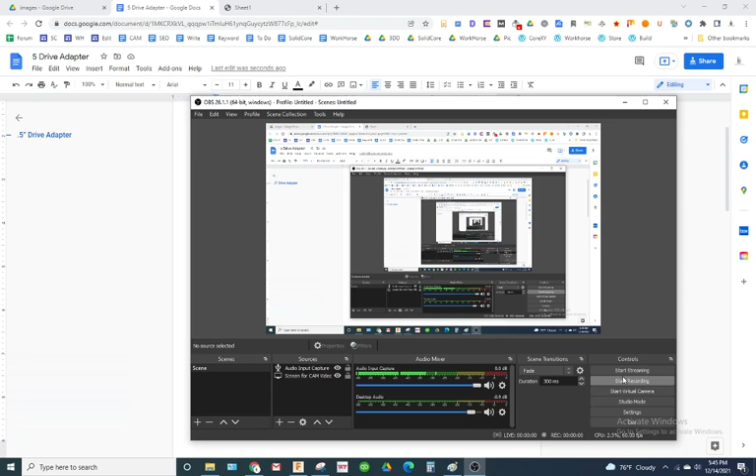Okay guys, so we're going to draw up this half-inch drive adapter.

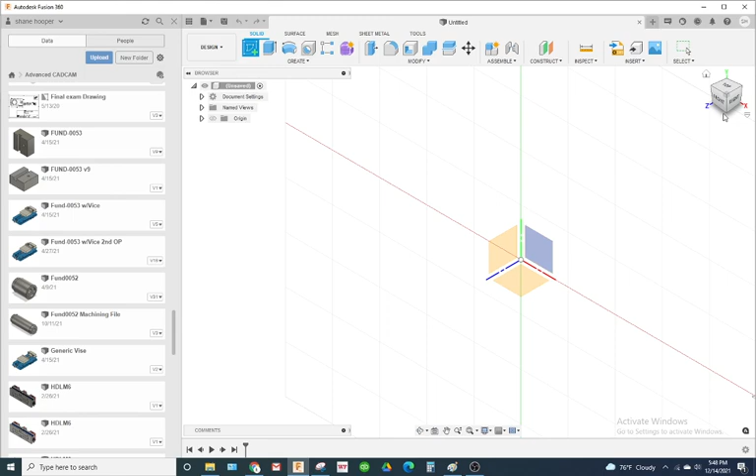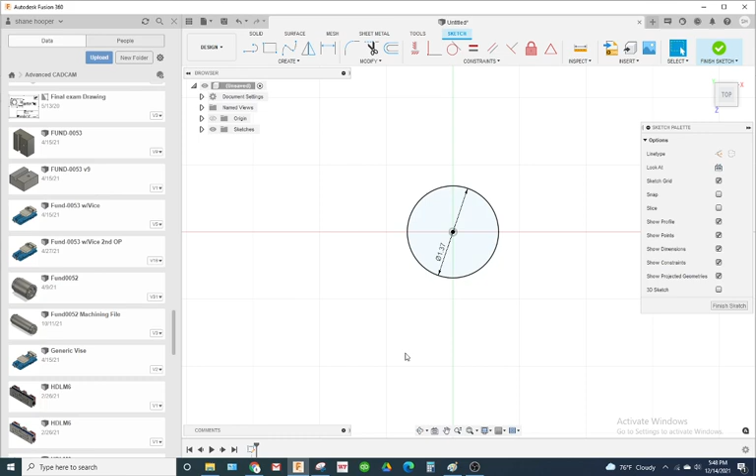So what I'm going to do here is I'm going to draw up a part, and there's a couple ways to do this. Go ahead and create a new sketch. I'll go ahead and select the top view, and we'll draw a circle. And remember, use the keyboard shortcut C for circle. Okay, so this was a 1.37 inch circle. We'll go ahead and put it at 512 thousandths long. It's not really 512, but we're gonna add the chamfer.

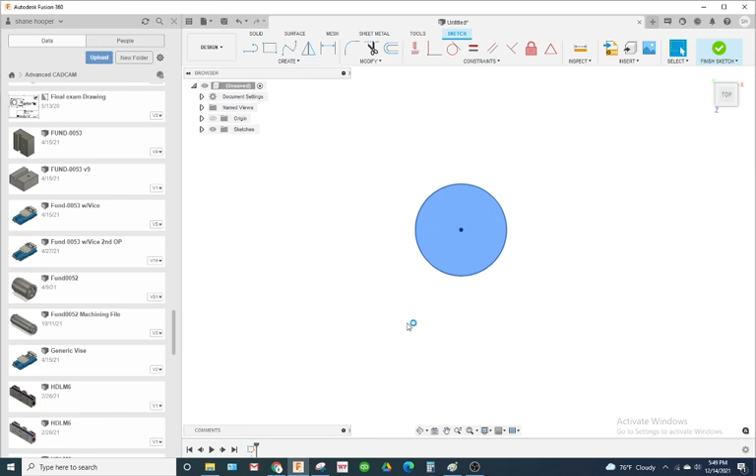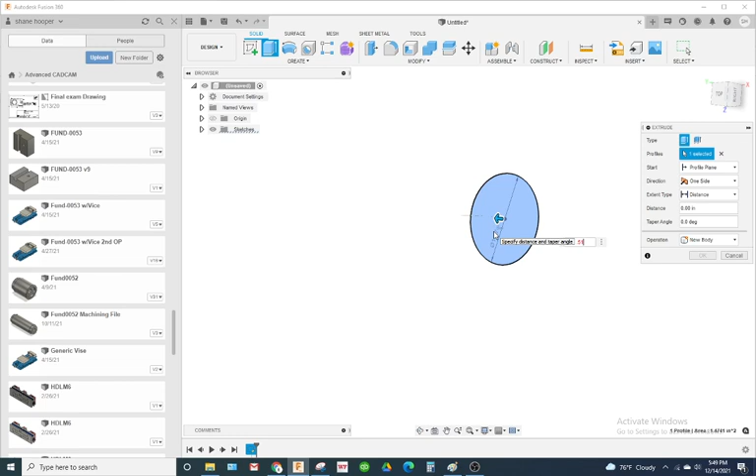So I'm gonna extrude this up, and you can draw the cross section too. That's a more formal way of handling cylindrical parts. So 512 thousandths. And this is in inches, by the way. Alright, so I'm going to go ahead and add onto that circle. So I selected a sketch plane on the face of that. So that's going to be the shoulder. The shoulder is 512. And basically we're going to draw...

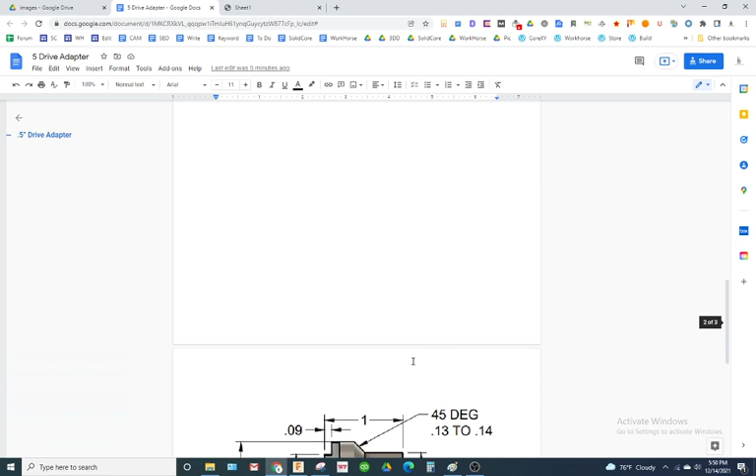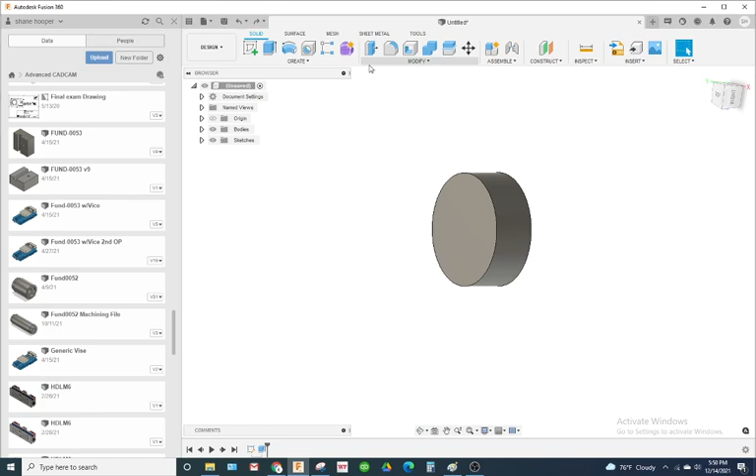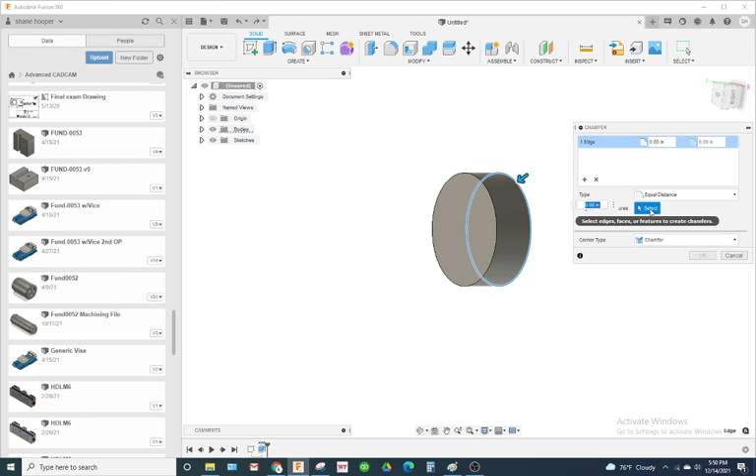Well, what we could do, we could go ahead and draw the hex. You know, I'm gonna hit back. I think I'm gonna do this a little bit different. This part's a little tricky. It doesn't look tricky, but it is. So I'm gonna go ahead and add that chamfer. Now the chamfer is 0.13 to 0.14. So we'll say 0.13. So I'm going to select this right here and make it 130 thousandths chamfer. So it looks like that.

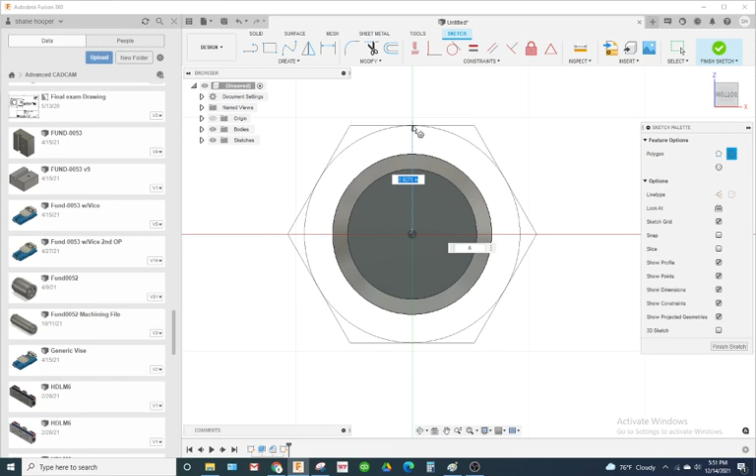And I'm gonna go ahead and create a sketch plane right here. And we're gonna draw a polygon. So it's gonna be a circumscribed polygon. So the math is gonna be based off the flat. Okay, so from flat to flat it's supposed to be 0.99. Now notice Fusion's going to give me the distance from flat to the center of the polygon. Alright, so what I'm going to do is I'm going to type in 0.99 divided by 2. And it looks like that.

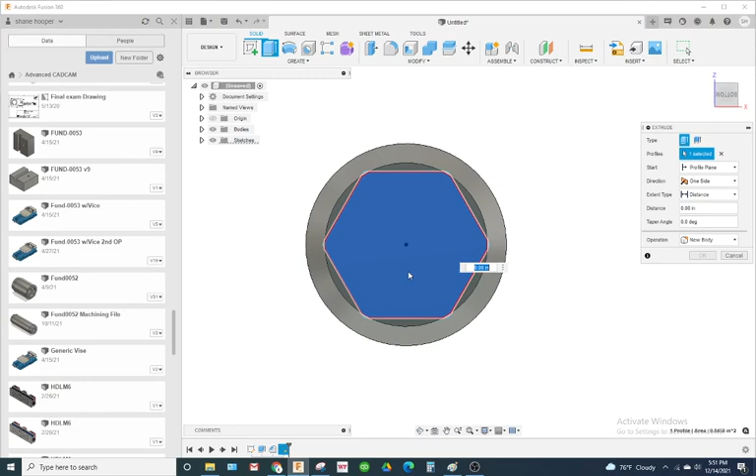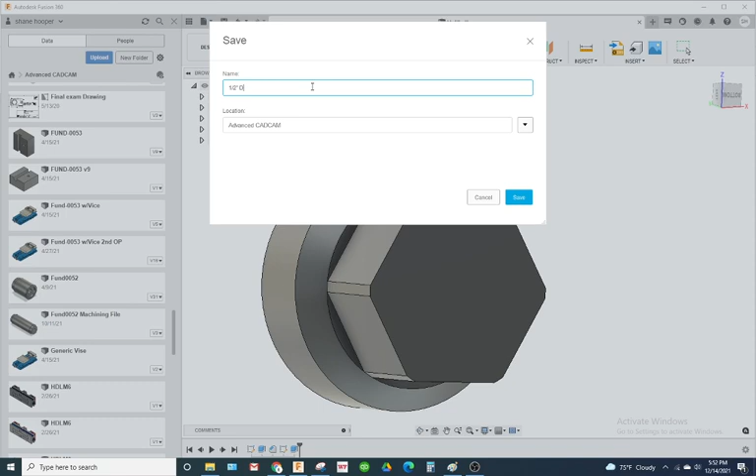Okay, so the hex is 488 thousandths wide. So I'm going to extrude this up 0.488. So I have something that looks like this. Go ahead and save that.

Okay, so we have a 3/8 drive. Basically, this is made for a drive socket wrench to fit in here, with a 3/8 drive, right? So, well, it says 0.37. That's because of the drives. This is a considerable amount of weight when it's made out of metal, and you don't want it to fall off the drive.

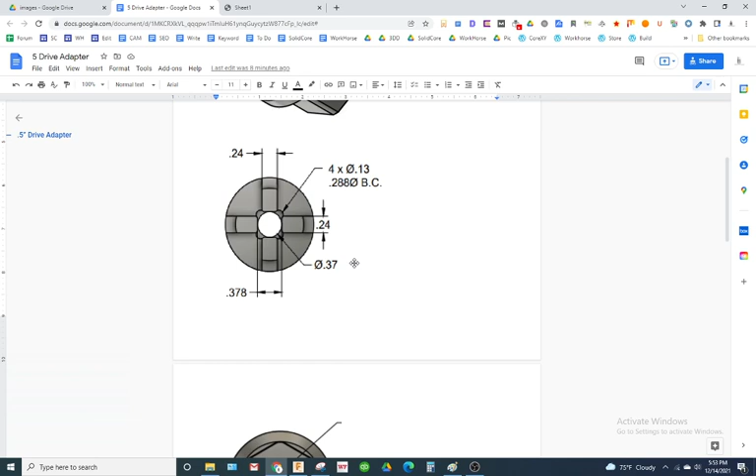So the drives aren't really 0.375, they're the other size, so this is gonna be 0.37, and it's gonna be on both sides. Now, because it's on both sides, what I'm gonna do is I'm gonna draw it up one time on one side and cut it all the way through, and draw out the rest afterwards.

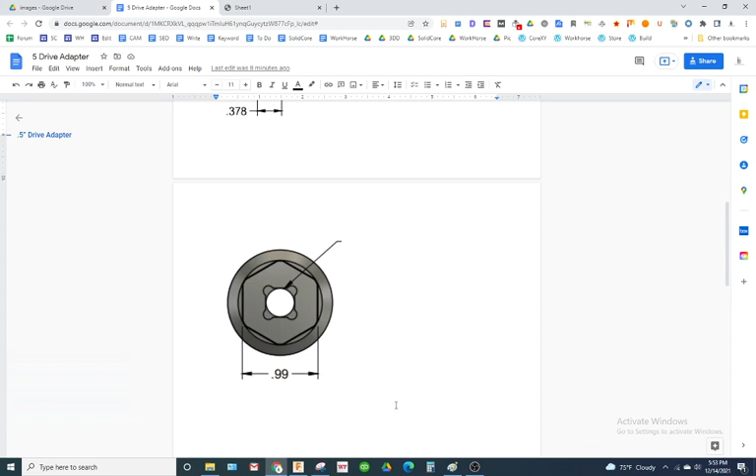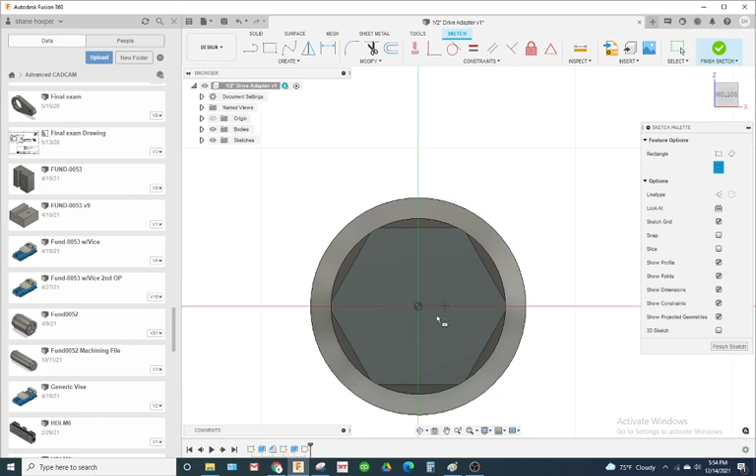Okay, so we'll go ahead and draw up a 0.37 square. I'm gonna create a sketch, select this plane, and I'm gonna go to rectangle, except I'm gonna use my center rectangle. I'm going to select my origin right here, 0.37, hit tab, 0.37 on both sides, and hit enter to place it.

We have 4 holes that are 0.13 diameter on a 288 thousandths bolt circle. So what I'm going to do is draw up one hole, position it and dimension it, then use my circular rotation tool and do a circular pattern to create the other 3 based off the first one. So 130 thousandths diameter, 288 bolt circle.

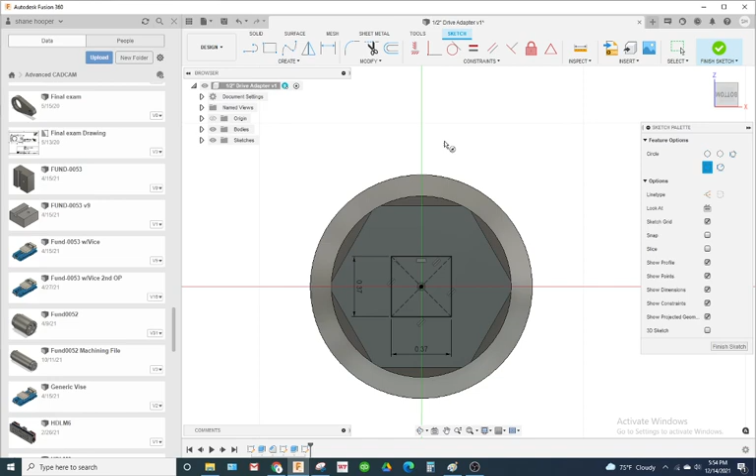So I'm gonna hit C on my keyboard for circle. I'm gonna zoom in, and I'm just gonna place it up here. The reason why I'm placing it up here is because I don't want to constrain it. I don't want to snap onto one of these lines, or this corner, because then the circle would be constrained and I couldn't move the position of the circle.

So it's a 0.13 circle, and it's on a 288 thousandths bolt circle. So basically what I'm going to do is hit D for dimension. I'm going to select my circle here, and select the origin, and place that leader line. So it's 288 thousandths bolt circle.

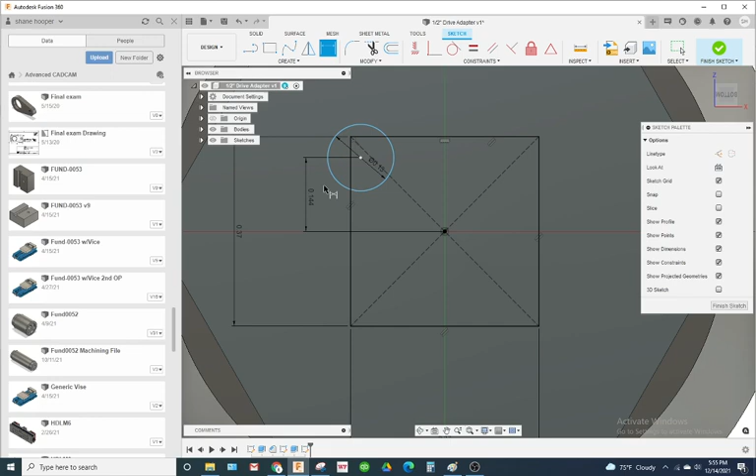So I'm going to go 0.288 divided by 2, because I'm dimensioning from the origin there. So I got my vertical dimension. Now I'm going to add a horizontal dimension, 0.288 divided by 2. I'm going to go ahead and trim this up before I rotate it, because it'll save me some work.

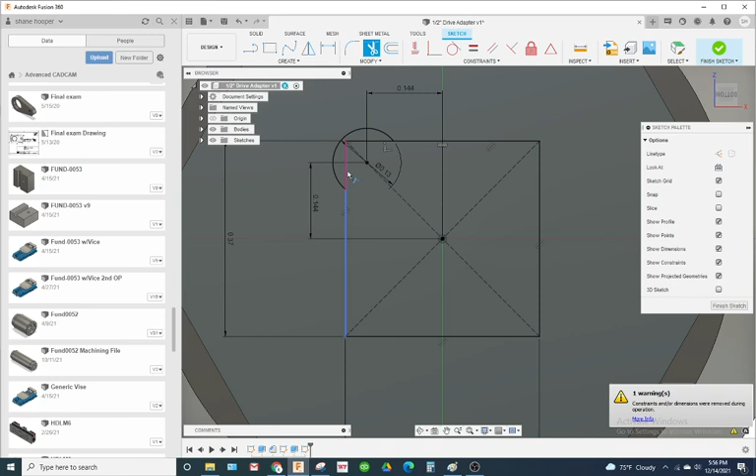Now I'm going to go to create, circular pattern. I'm going to select this arc as my object. My center point is going to be the origin right here. As you can see, it's got a preview of 3 more arcs, 120 degrees apart, so I'm going to bump this up to 4. The preview looks good, so I'm going to hit enter.

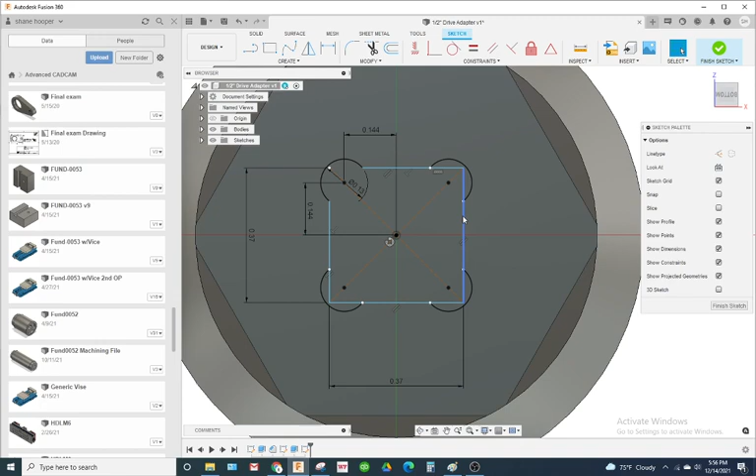Now I'm going to go ahead and trim up these corners here. You don't actually have to do that, I just like to clean it up.

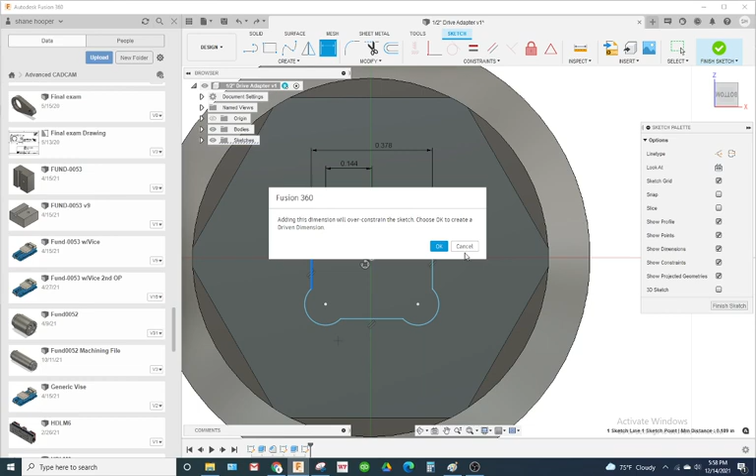Okay, so what we'll do is we'll just go right here, dimension from here to here, 0.378. Now dimension from here to the origin or center. Okay, so it's gonna over-constrain it if I do it right there. Let's try this. Alright, so why?

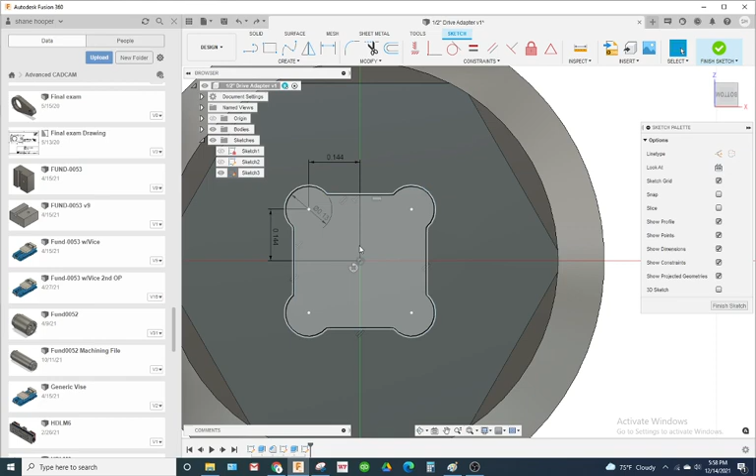Okay, I'm gonna show you a better way to do it. That didn't work out. Alright, this is what we're gonna do. So I'm just gonna place another rectangle. Stuff like this happens all the time - you draw something up, you look at the print again, and you're like, oh, I need to fix it. So here's a quick, easy fix.

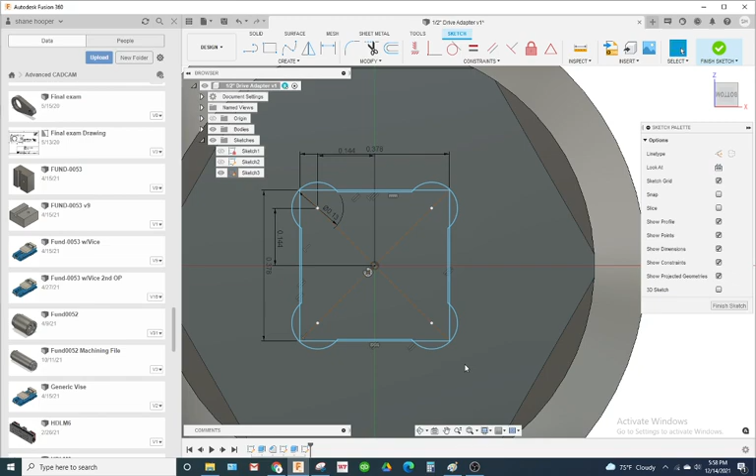So I'm gonna draw a box over it, 0.378. Tab, 0.378, hit enter. Now if I zoom in, you can see I have extra geometry here. So I'm going to go to trim, and trim up what I don't need. Easy fix.

This isn't just a lesson in how to draw this part, this is a lesson in just how you use Fusion 360.

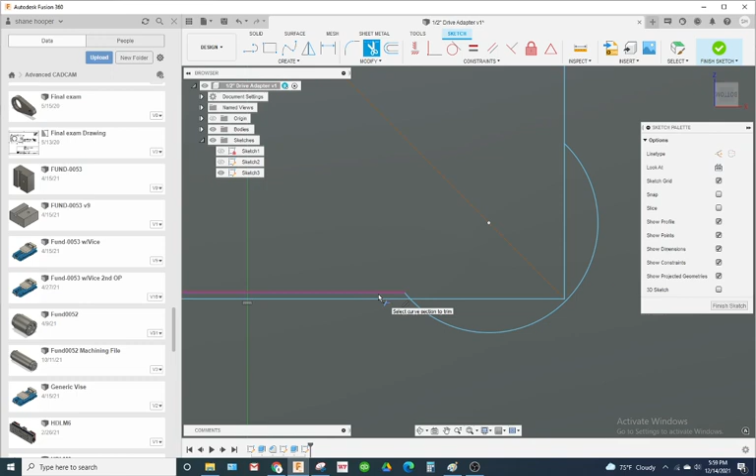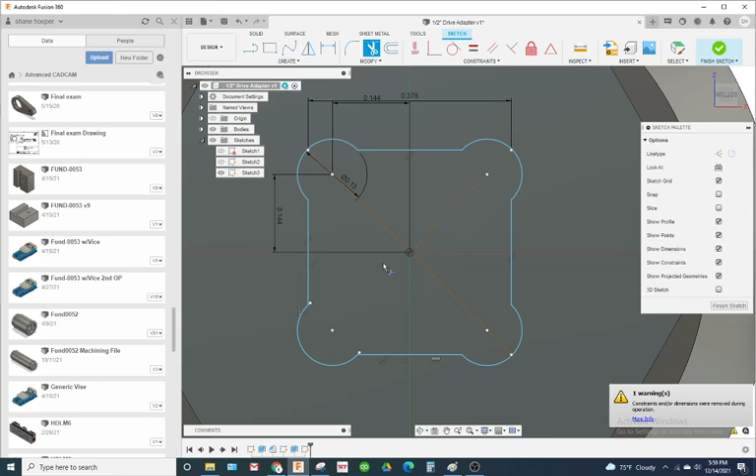Go ahead and finish trimming up what I don't need. Alright, go ahead and save.

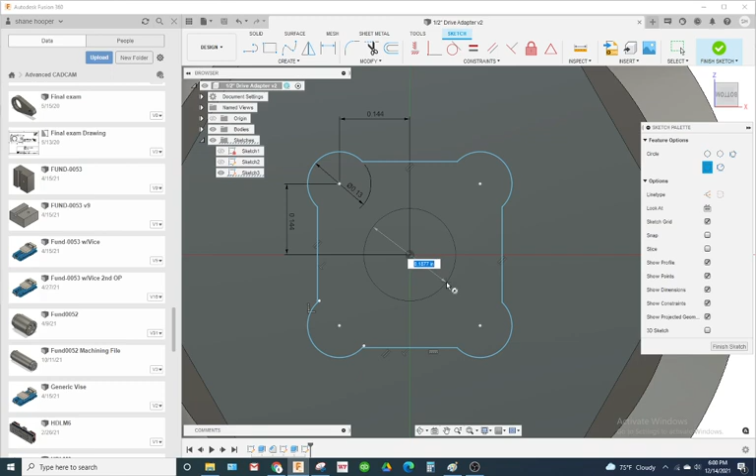Okay, so there's a through hole through this. I wonder if we should draw this through hole up. I'm trying to take the most efficient way. I'm gonna go ahead and just draw a circle up. So there's a through hole, it goes all the way through - obviously, that's why it's called a through hole.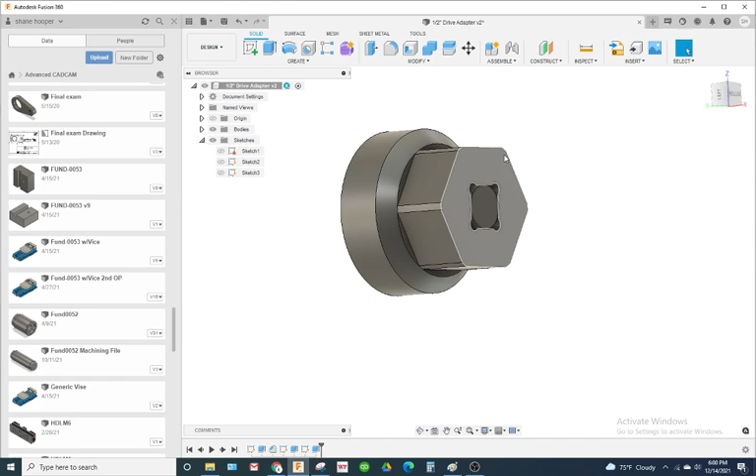So what I'm looking at is, if I extrude this, this is what I get. It still has this material right here. And if I go to my bodies list, I actually have 2 bodies. This 0.37, what was supposed to be a through hole, is now another body inside, right?

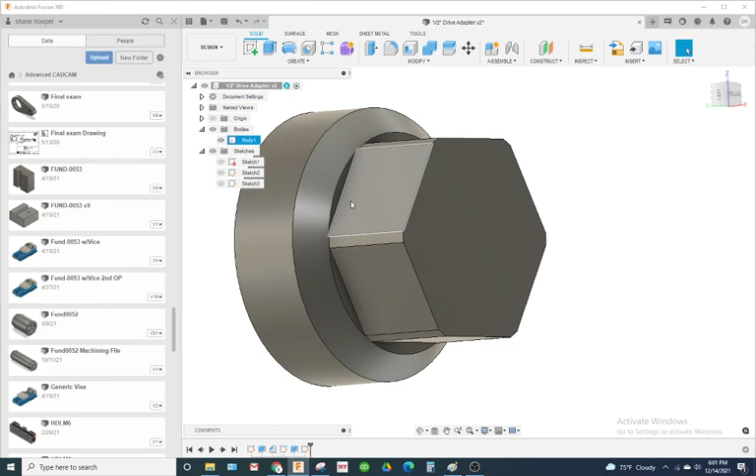So I'm just going to delete that. Alright, so see how it deletes the whole cylinder? So what we're going to do, I hit undo a couple times, and we're not going to be able to use that.

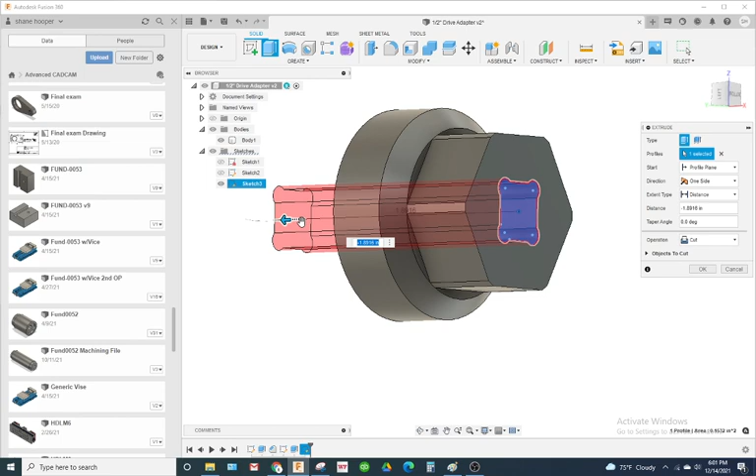Okay, so I have this all the way through, right? Now, it's not really quite right, because if you look in the middle, if you look at the print, there's a floor in there.

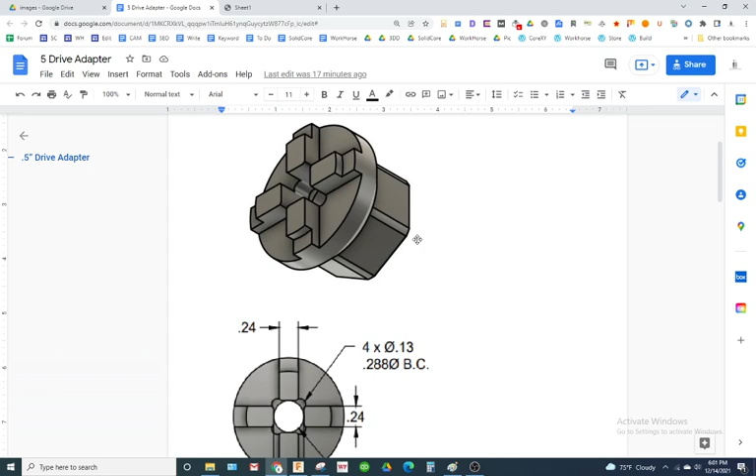So this drive is 0.378 and 0.378 deep. I don't think it says it on these dimensions, but I'll update that. And don't ask why it says half-inch drive when it says 0.37 adapter.

This originally was a half-inch drive. Let's see, where'd it go? So right here it says leader line. It was originally a half-inch drive adapter to 3/8, but I decided to make this assignment a little bit simpler. We'll just do a 3/8 all the way through.

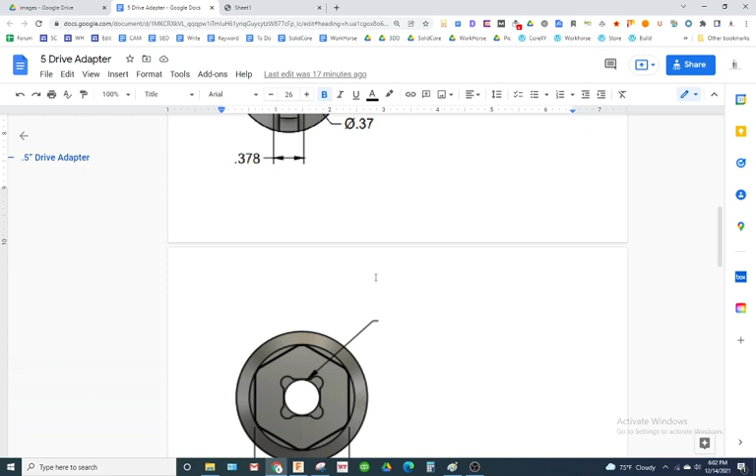So a 3/8 drive is going to be 3/8 deep, okay? So with that said, what I'm going to do...

Alright, so what I'm going to do here is construct an offset plane. Now you don't have to do this. There's other ways of doing this. Well...

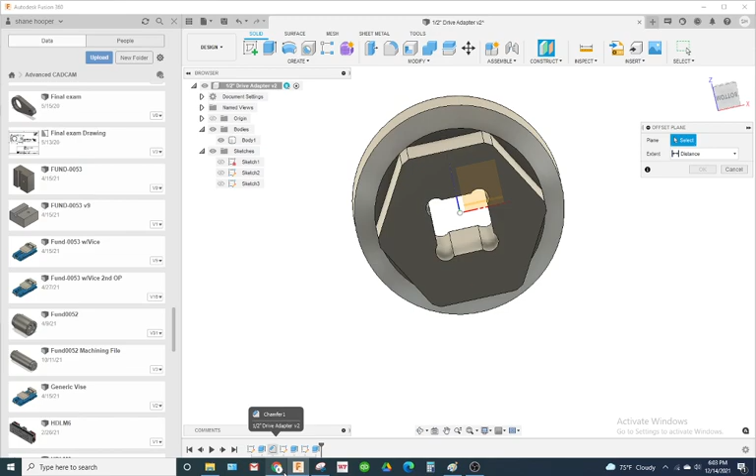Okay, so notice this, let's look at these print dimensions. That says 3/8 deep. So right here, according to this dimension, it's 0.378. That's where that shoulder is. We'll just go off that for now.

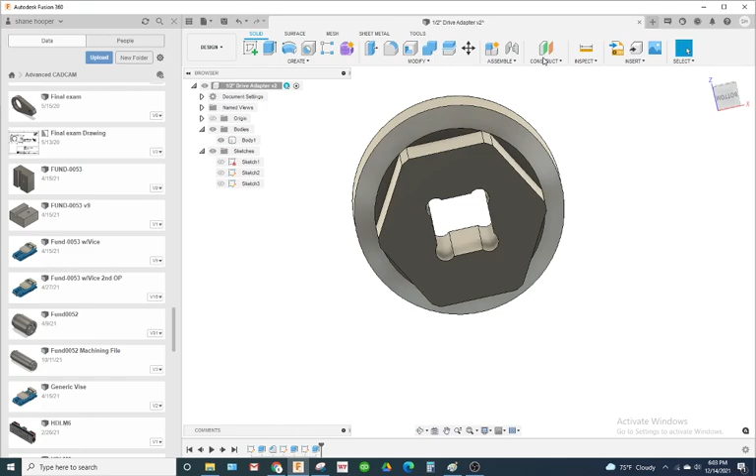So one thing I could do, if I wanted to, is either create an offset plane, or I could also create a sketch on this plane, and then go to my offset. So let me do it. Okay, it's not going to do it.

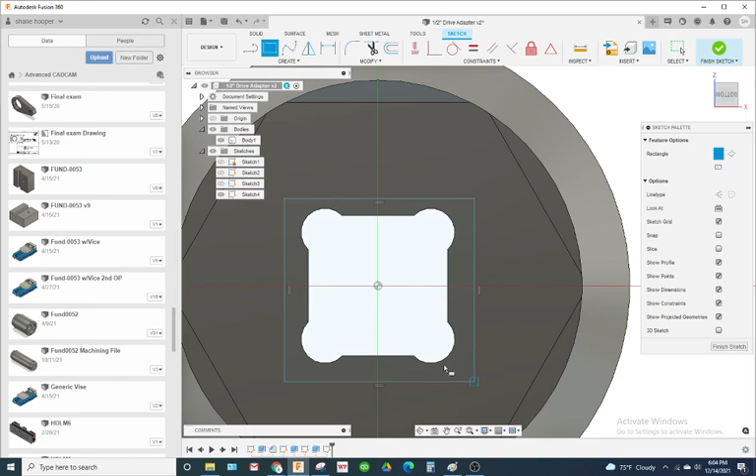Alright, so what I'm going to do, I'm just going to draw a rectangle. I'm just going to fill in that middle part, basically. See, if you see what I'm doing, that rectangle is on this face, right?

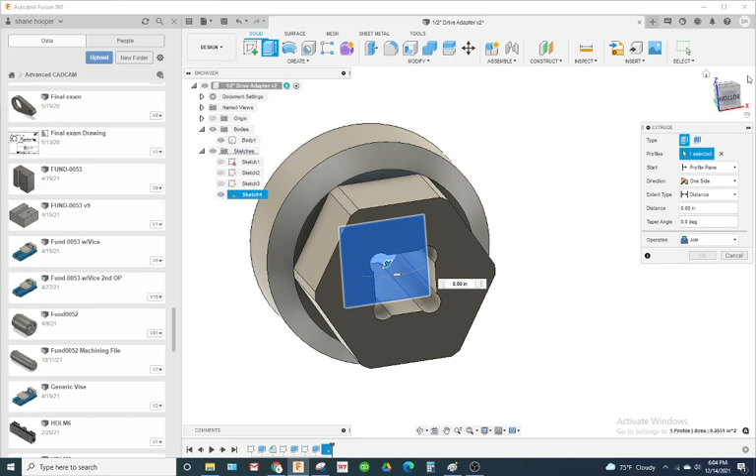So I'm going to hit extrude, extrude this rectangle, and put it on join. And I'm going to extrude this up to this face. Now notice it says minus 0.512, that was the distance to the face, right?

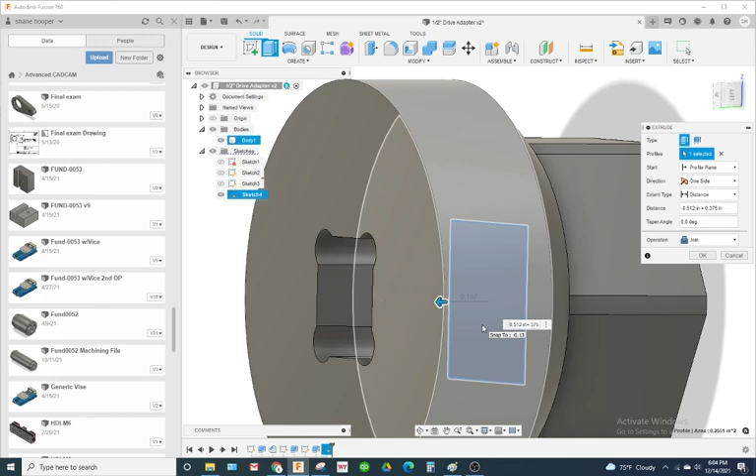I'm going to go to that face, but I'm going to go plus 0.375. Alright, so if you look at side view...

Here, let's do it the other way. So if I join it, I can join it up, because what I'm looking at, it's 0.375 from here, so I actually need to add material to the right, okay?

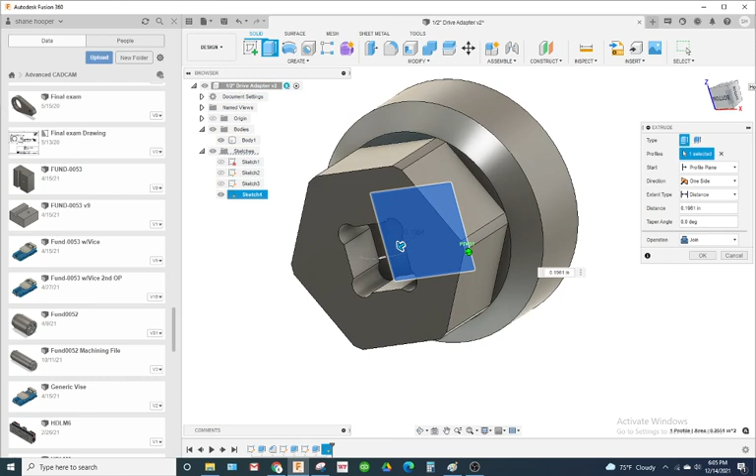So if I need to add material to the right, I'm going to pull this, and the operation's still on join, and you can see it added material right there.

So I'm going to go to this face, which that distance would be 0.488. I'm going to go minus 0.375. So it's going to look something like this. Okay.

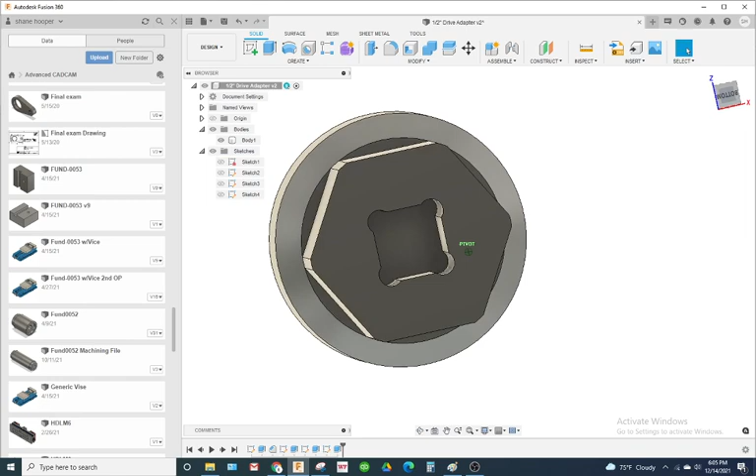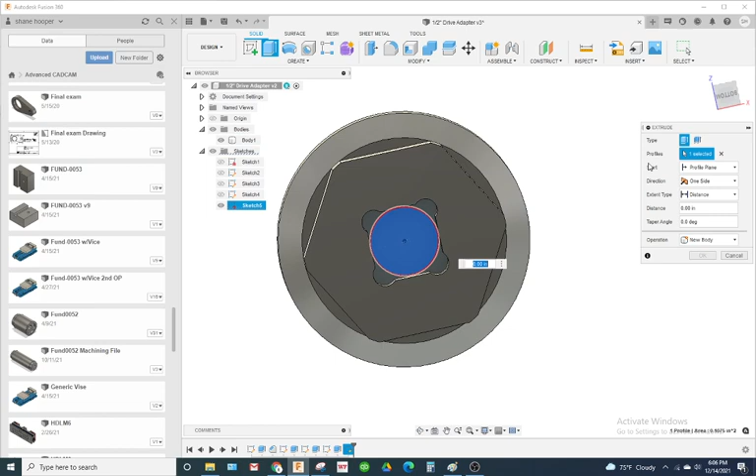Alright, so now we'll go ahead and hit save. And I'm going to create a sketch on that floor and draw a circle right here. So the circle is going to be 0.37. And I'm going to extrude cut that. So it looks something like this.

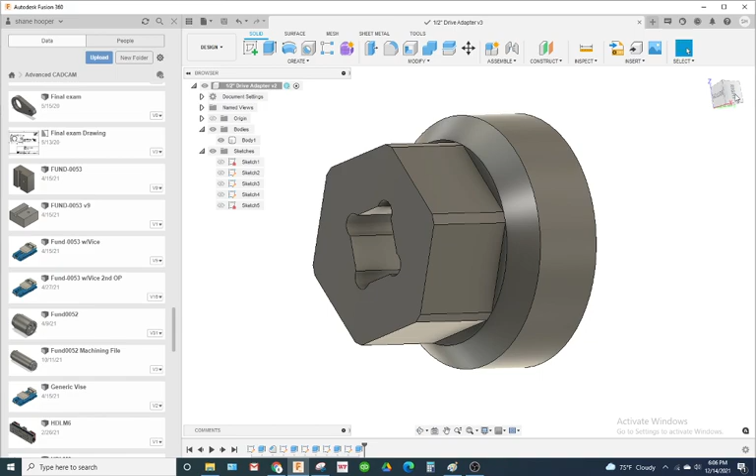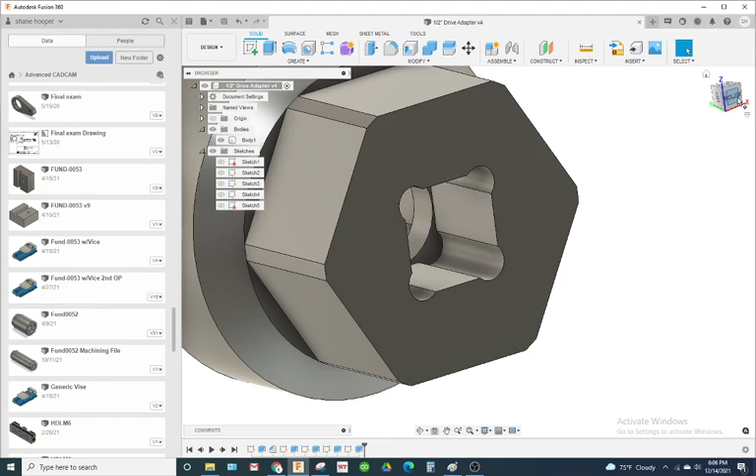I may or may not remake this video. I don't know, I kind of goofed up a couple times, but it brings up some good points because sometimes you're going to look at a print and you need to go back and modify it, or take a different approach. So it kind of shows the example of how to look at the problem and assess it, and different options on how to move forward. So I may leave this video up, but we'll see.

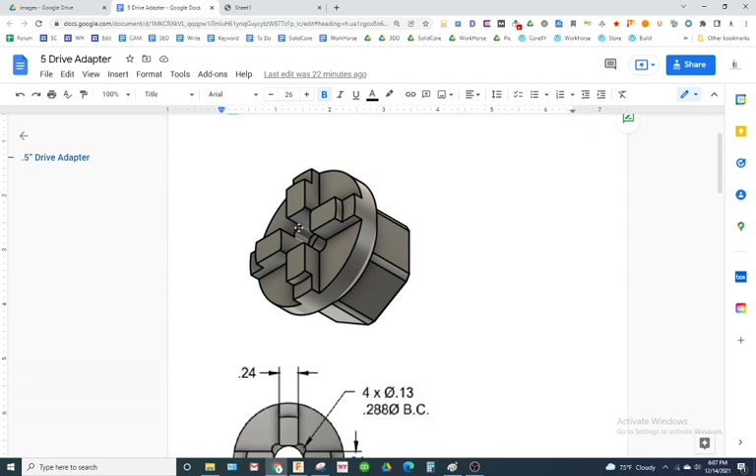Okay, so if you look at the side view, from the top of this raised surface to the bottom of this raised surface is 1.054. Now that's a radius. Probably should have added more notes to it, but this is a radius right here, okay? So just keep that in mind.

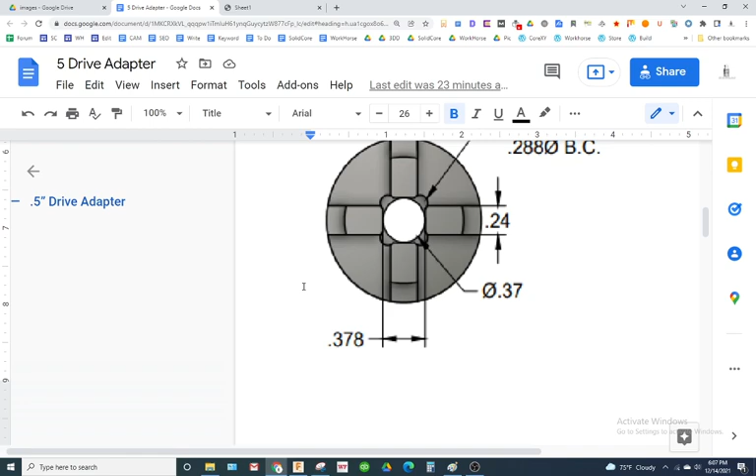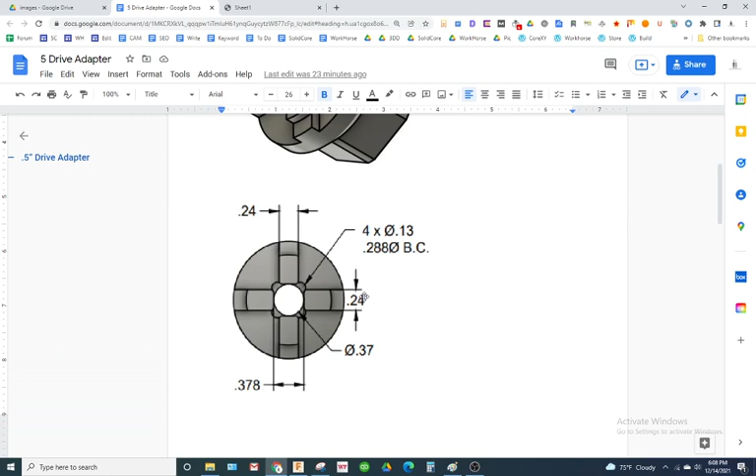Okay, so we also have this cross on the raised surface that's 0.24 wide on both sides, horizontally and vertically, and that sticks up.

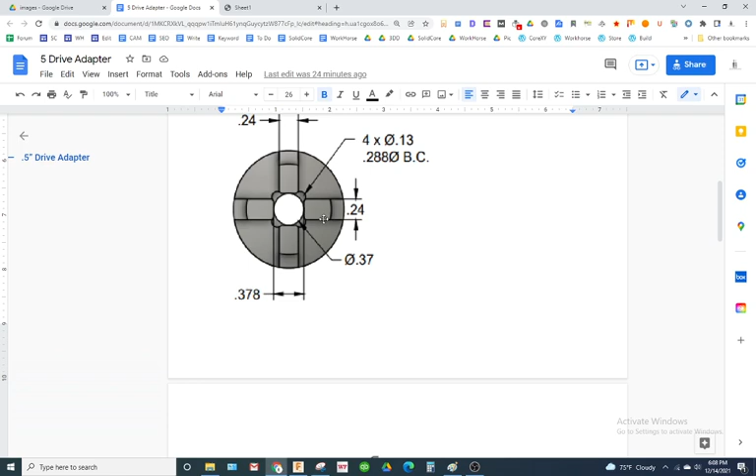So I'm going to use my center rectangle again. We'll make it 0.24. Now notice I didn't get a vertical dimension. It doesn't matter because I'm going to use this as a tool, and basically this intersection right here will give me a face to select.

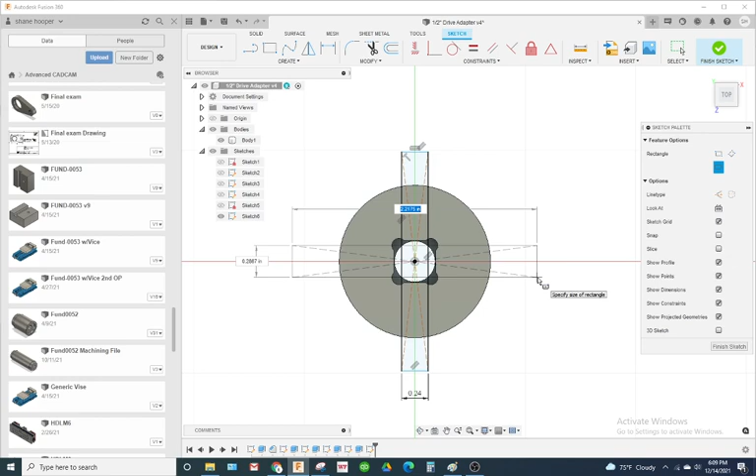So I'm going to go back to rectangle, center rectangle. I'm going to select the origin, and I'm going to do a horizontal box, 0.24 wide.

Okay, so this is what I'm going to do. I'm going to hit E for extrude. I'm going to extrude this face, this face, this face, and this face, and extrude it out.

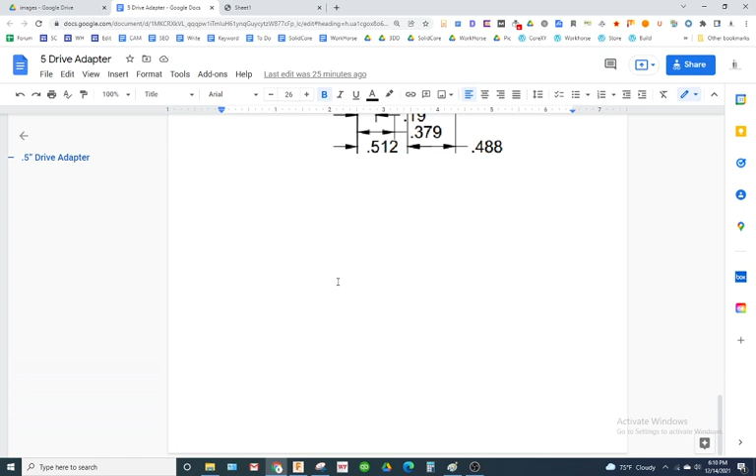0.19. Well, hold up. One thing, we drew up the main body of this at 1 inch, right? So if we extrude it out, we would now be 1 inch 0.19. Alright, so knowing that, let's reassess the situation.

So instead of extruding it out and making the part long, which we could do, I'm going to show you a better way. I'm going to clear these profiles, and I'm actually going to select.

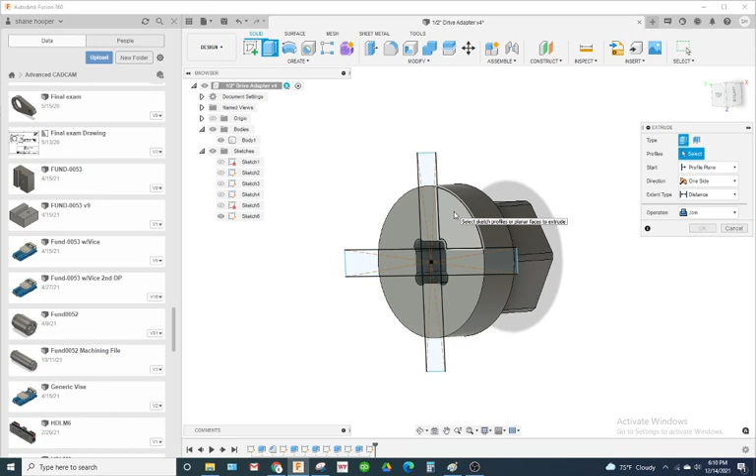Let's see, I'm going to select these, and we're going to cut these in minus 0.19. So it looks like that.

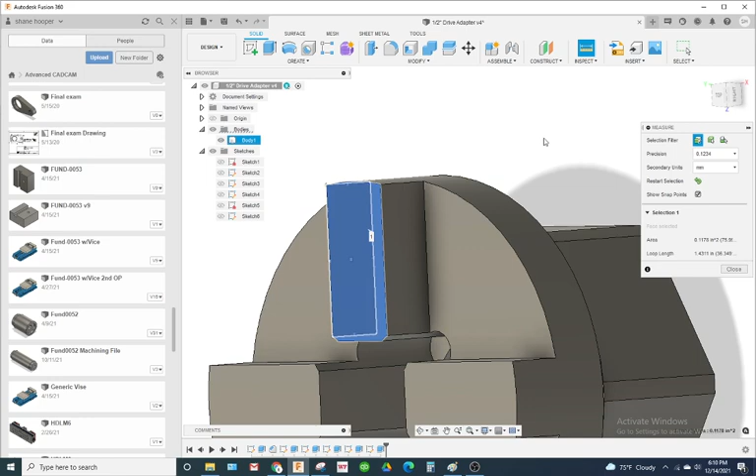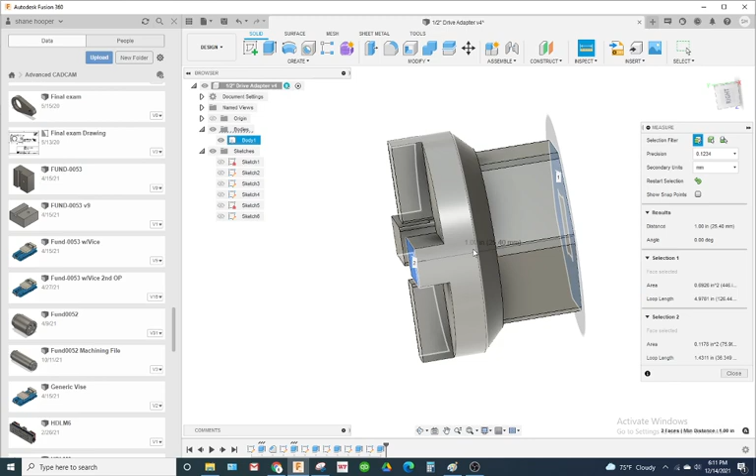And if we measure the overall length of the part from here to here, we have 1 inch. I don't know how well y'all can see it, but it says 1 inch.

Alright, so these legs or raised surfaces, they kind of end up here, right? And if we look at a side view, there's basically a 90 thousandths relief for this 1.054, we'll just call it diameter arc.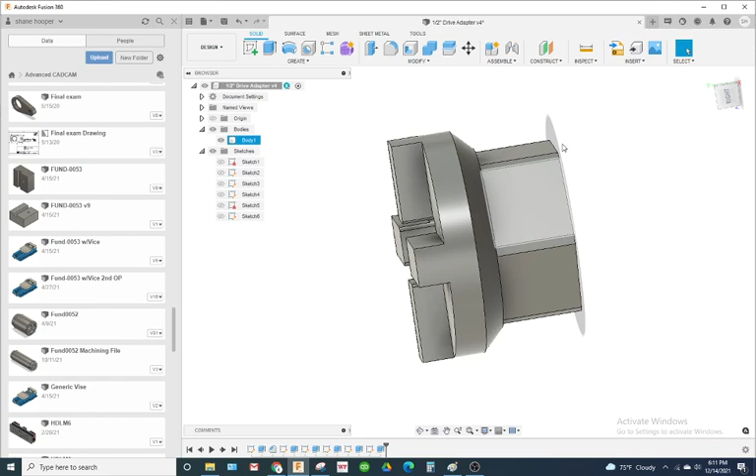So what I'm going to do is create a sketch plane right here, and I'm going to snap onto this origin.

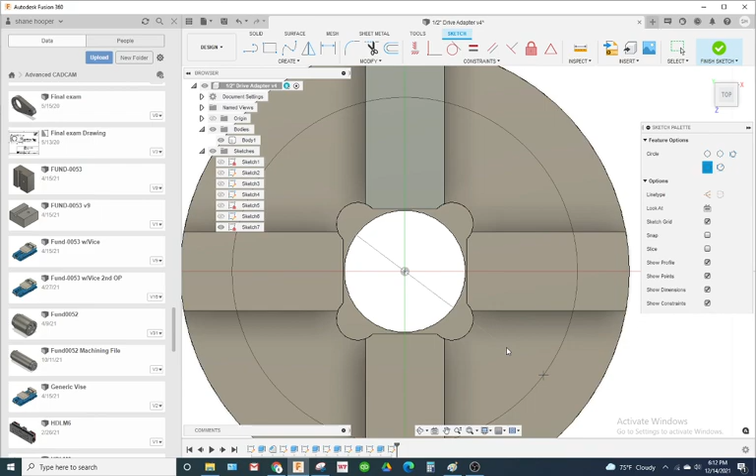I'm going to go 1.054. Double check that. Yeah, 1 inch, 54 thousandths. And it's 90 thousandths relief.

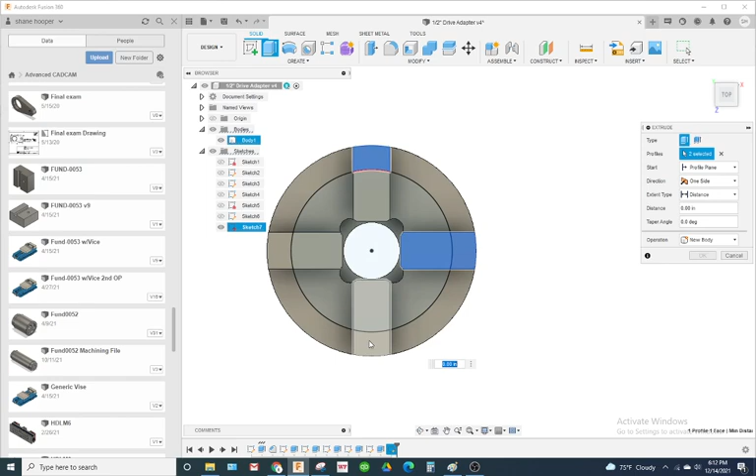So I'm going to go extrude. I'm going to select this face where it intersects. I'm going to tilt my model to the side a little bit, and I'm going to pull in 90. Okay, so I want to select the whole vane there.

What's up with that? Here, let's hit escape and try this again.

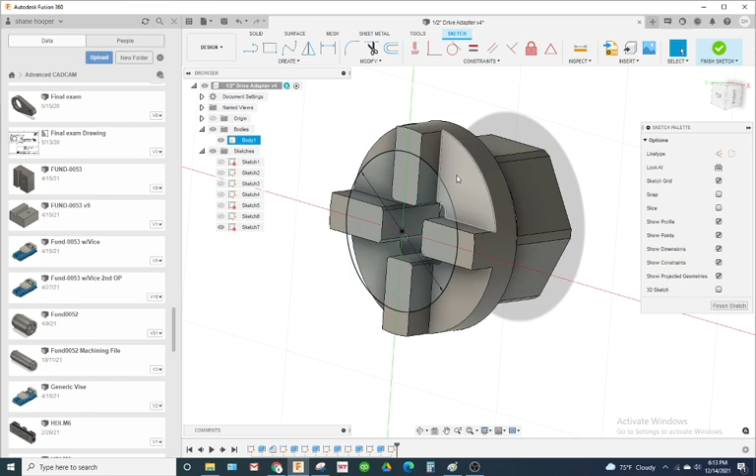Okay, so the reason why it's doing this is because I selected this raised surface for my sketch plane, right? Now because that's my sketch plane, these raised surfaces aren't on the sketch plane.

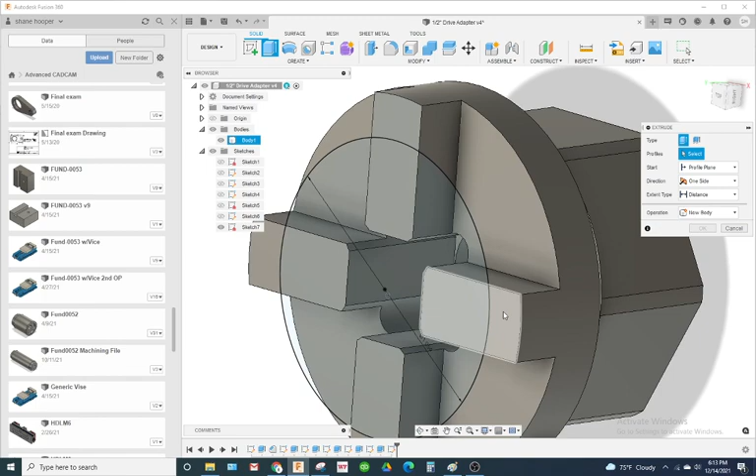So if I try to extrude it, this is what happens. I can extrude this, and I can extrude the circle, but I can't actually extrude this. It wants to extrude the whole raised surface.

So what we could do, we'll go ahead and cut this in minus 0.09. So I have something like this. And let's try this.

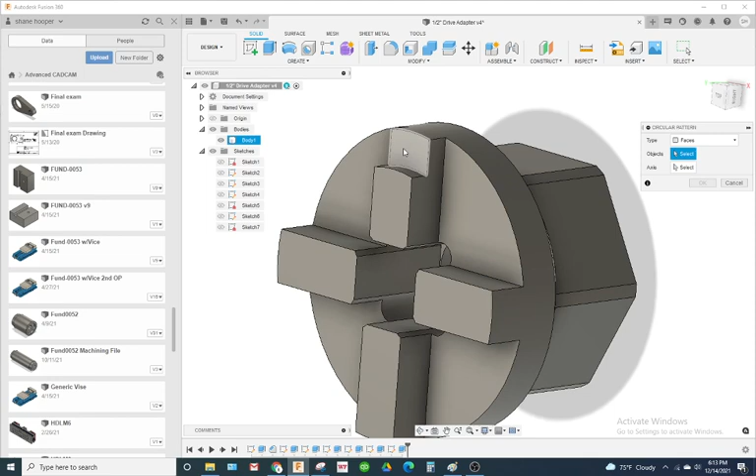Let's try doing a circular pattern. I'm going to go pattern, circular pattern. I'm going to select this surface, and I'm holding the Ctrl key down. It's like select 2. And my axis will be right here.

And there's 4 of them, so quantity 4. There we go. There's different ways to do this. That's just one way.

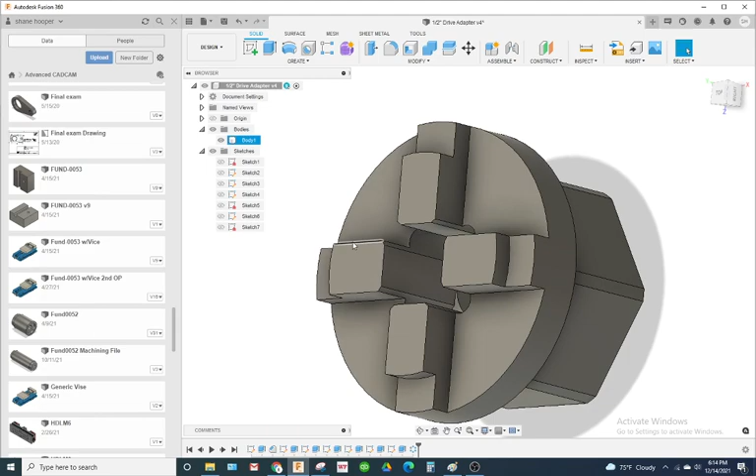It's good to explore different ways, different options to draw the same part up, because you're going to run into problems, and it's good to have another tool you can use, or another tool you know how to use.

So this is the part, and we'll call this video done. I'll post another video right after this one on how to do the cam.